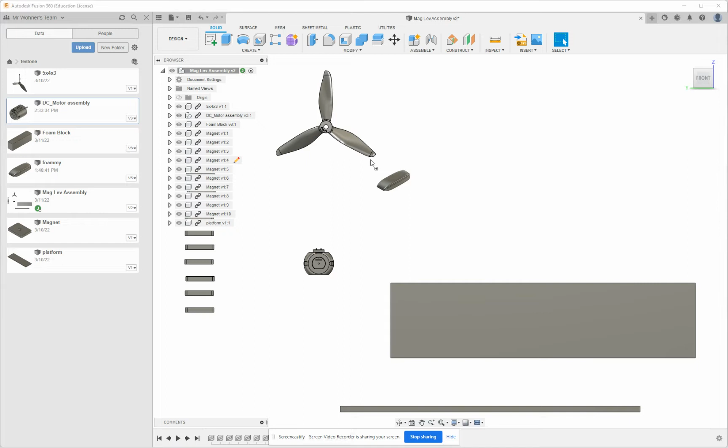So I opened up the maglev assembly here, and now we're gonna add our foam block. It's right here, click and drag and drop it in, then move it over to here and press OK. This block itself, I'm gonna hide that, so I'll turn off its visibility.

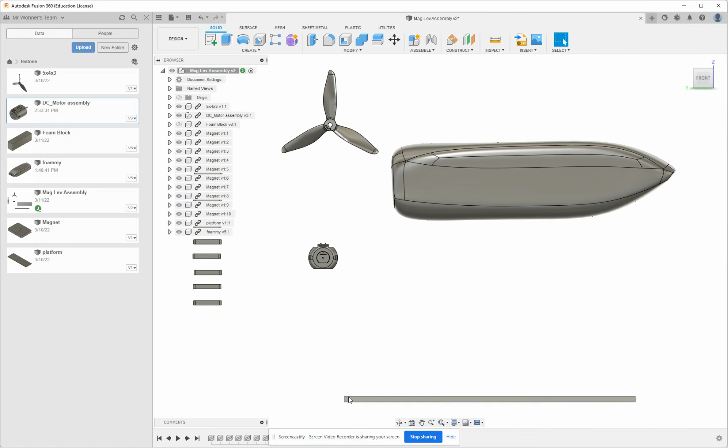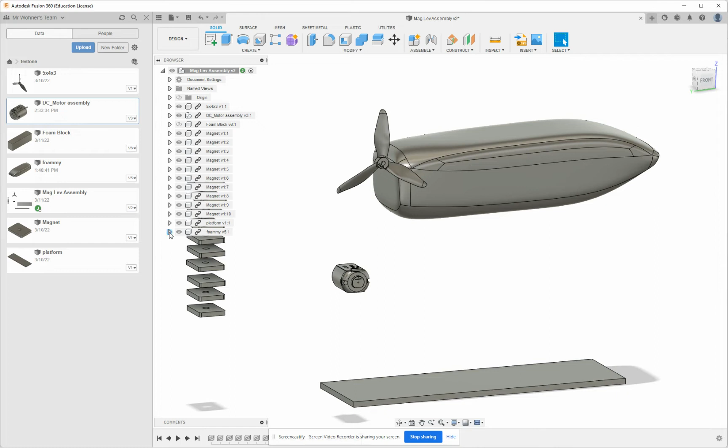Now, when you assemble joints, you need a point to assemble them from. I'm going to bring this one to the top of this base plate. When we built this, I knew where the origin point was, so it doesn't necessarily have a point on the end here, but I do have the origin. I just need to make that visible, so I go to the item, expand it, and turn on origin visibility, and there's that origin point. If I expand this, this is the origin point.

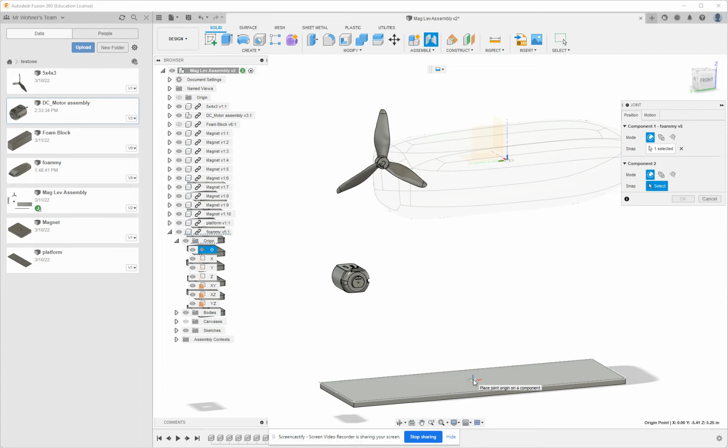Okay, so I'm going to assemble a joint. I click Assemble Joint, and the first one has been selected, which is the origin point, meaning the origin is going to move to this one here. That's the second one I want. I want to put it right on top of the center of this.

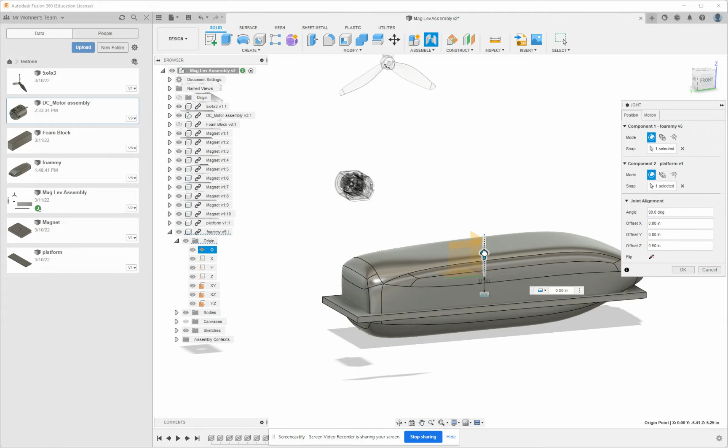I placed the two there, but you'll see that was the middle of that particular item. I know this was 2.5 inches tall, so the center of this was 1 1/4. I need to move it in this direction, 1.25. Okay, so there we go.

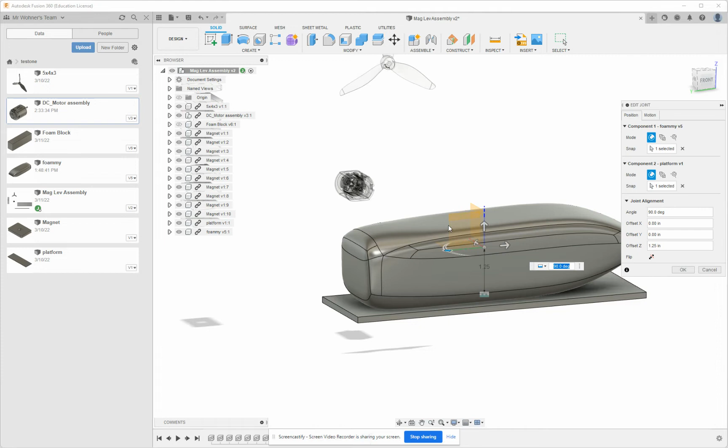Now this one has been placed, and if I needed to still move it, I can continue to move it because I've created the joint right here. I can go to the joint, right click, and edit joint. If I need to adjust it, like move it back a little bit, I think that's probably the best place, and that looks most accurate. So that's how you create a joint. I can turn off my origin visibility on this one.

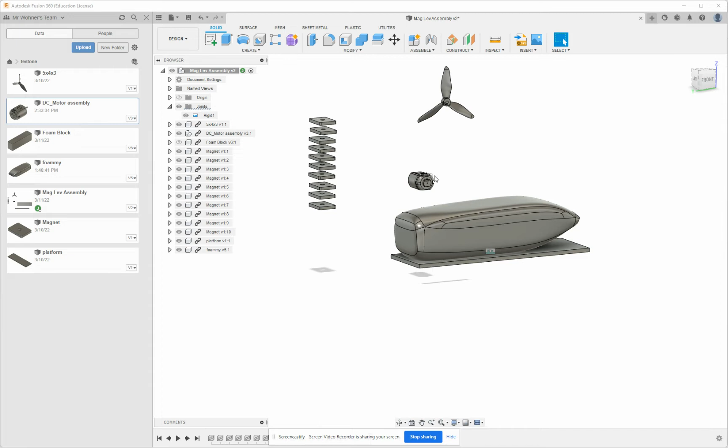Now there's some other special joints you want to try. The other one is when you're going to put the propeller on top of the motor. During the joints, you want to make sure you grab the point that you're attaching it from. So I'm going to construct a new joint.

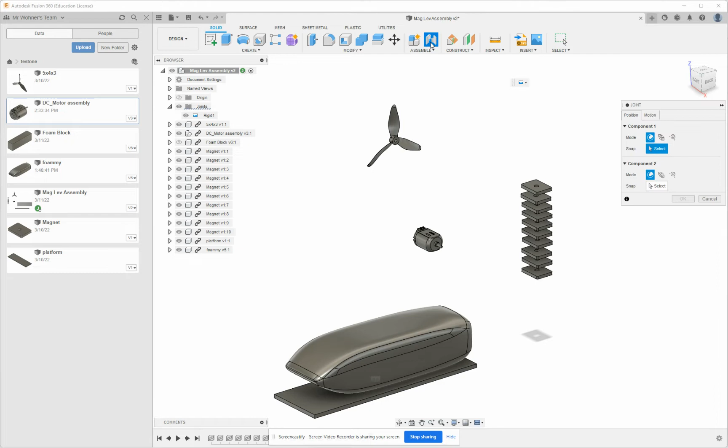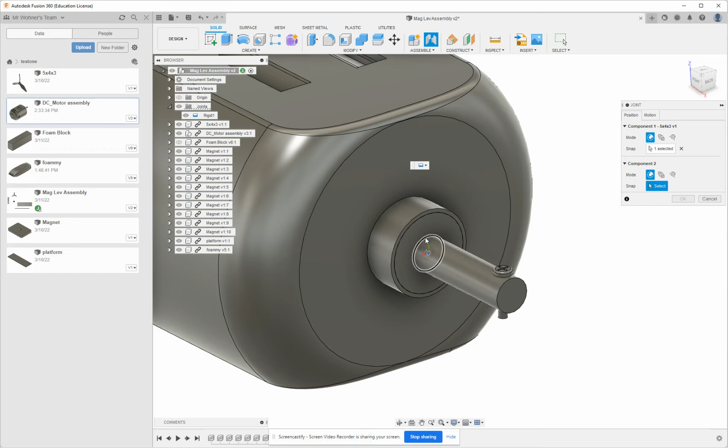Here's the shortcut, assemble a joint. I'm going to zoom in and get the center of this shaft, the back end of this shaft here. If I click on the circle, that means I'm getting the center point of it. So that's the first one selected. The second one is where I'm going to attach it to, and I want to attach it to the center of this.

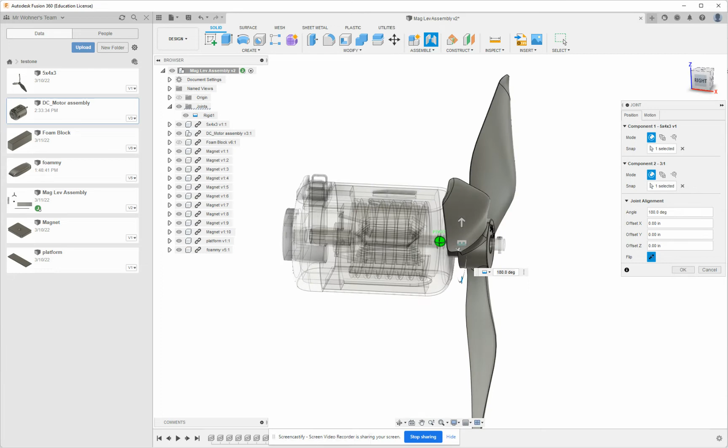So there we go, it is now attached to the center. Let's take a look and see if that's good. It is, but it's actually flipped, so I need to flip it, and that's the way I want it. It's now in the right position, so I can press OK. All right, so now those two items are put together.

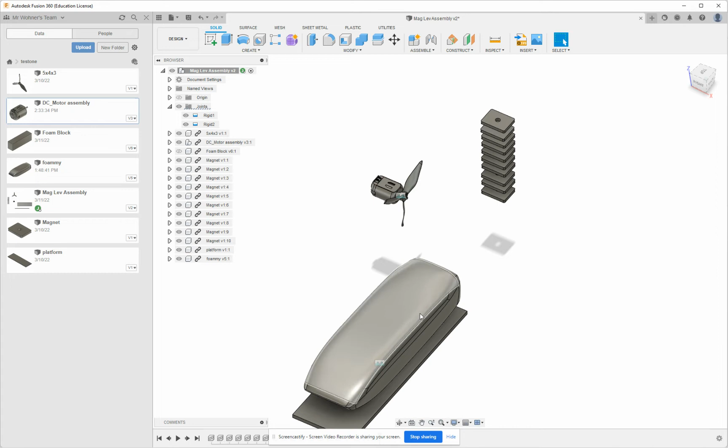Now, the last thing I'm going to do is show you how to get this motor over to a point on the car here, the foam block. So you need to find a place on the motor. The interesting thing about the motor assembly is that if I expand it, it's made up of a bunch of different bodies, so we need to first create a rigid group for this.

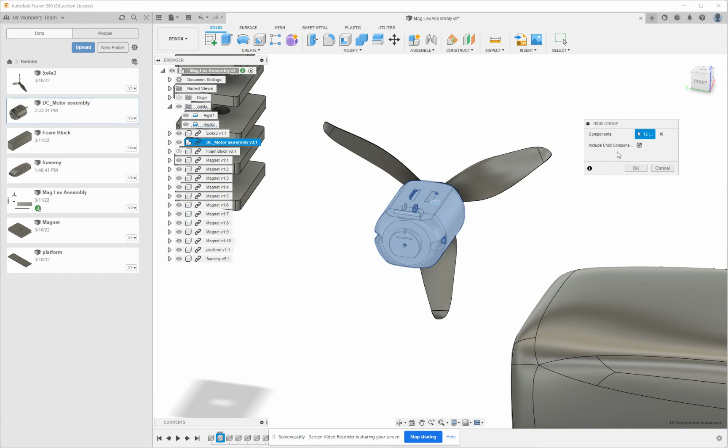So I'm going to click on the DC motor, right click it, and make a rigid group. All 12 of those components are locked together and will move consistently together. I press OK, so now I've done that. Now I can go ahead and move this motor along with the fan that's attached to it.

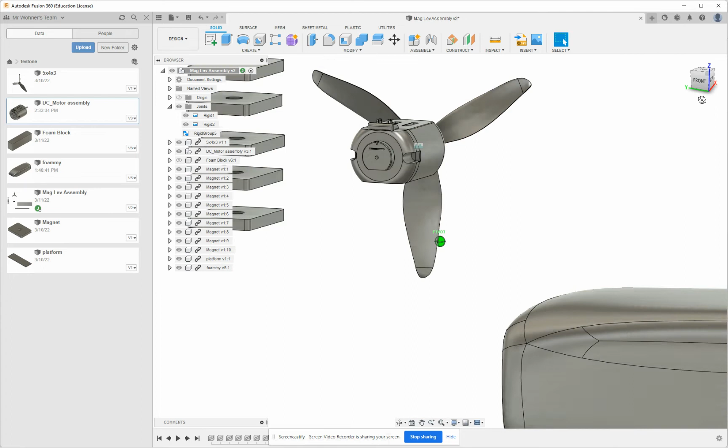We need to find a point where we want to put it onto this car, but there's no exact point here that I'm going to find. So let's make one. We need to go into our sketch and create a point, and I'll show you how to do that in a second.

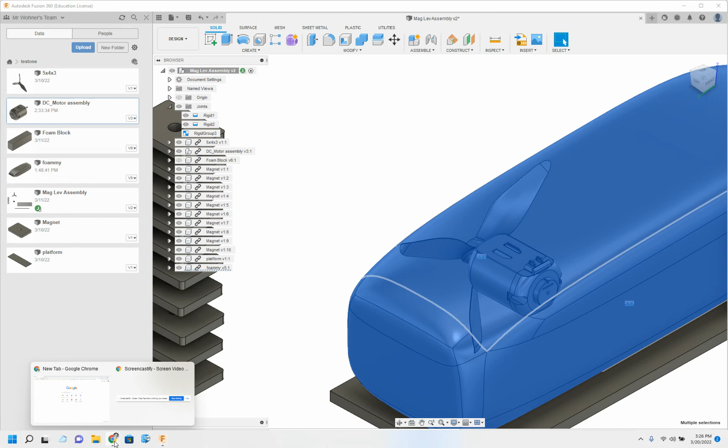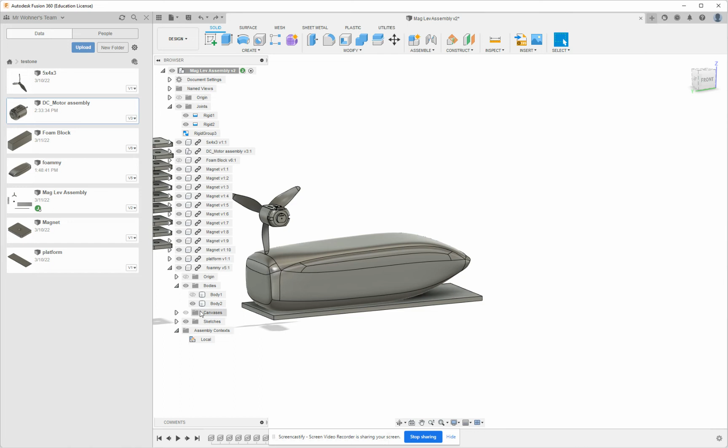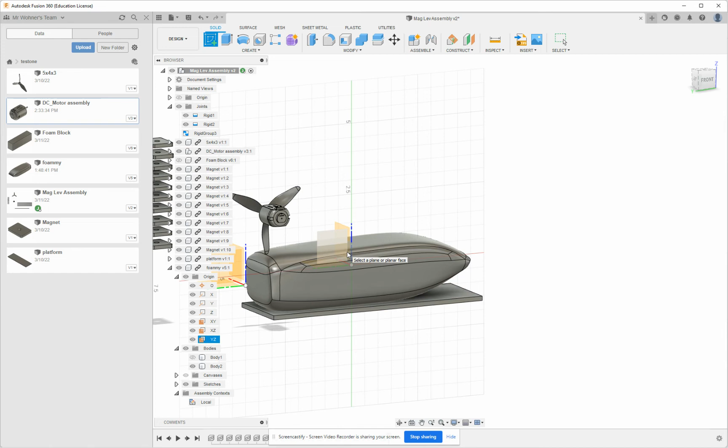Okay, so we just need to make a point on this to attach it. We're going to take this body, called the foammy. We're going to turn on the origin and get that origin point again, and create a sketch using that plane. We want to create our sketch on this plane here.

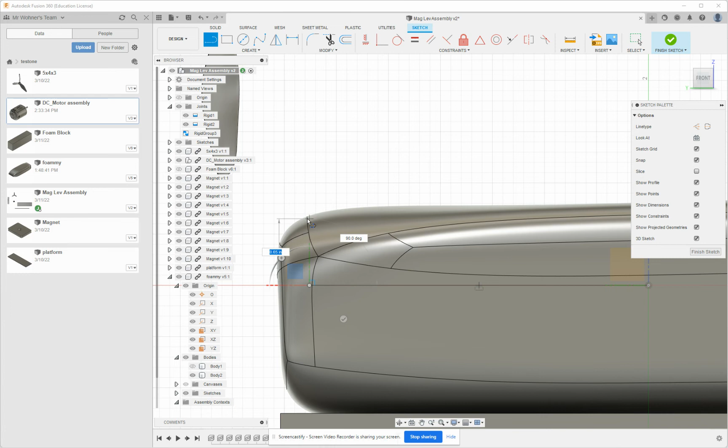We'll change our view and draw a line starting at the origin and bringing it right out to about there. Then put another line and put a point right there, and finish that sketch. So now we do have a point that we can bring this to.

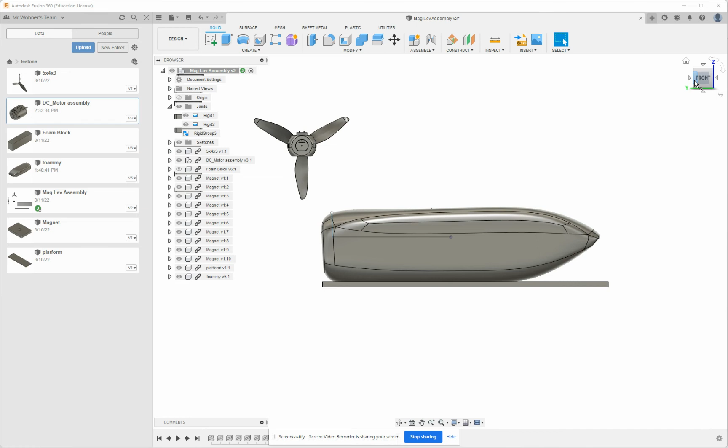I can turn off these origins. So there's a point there that we can attach this to.

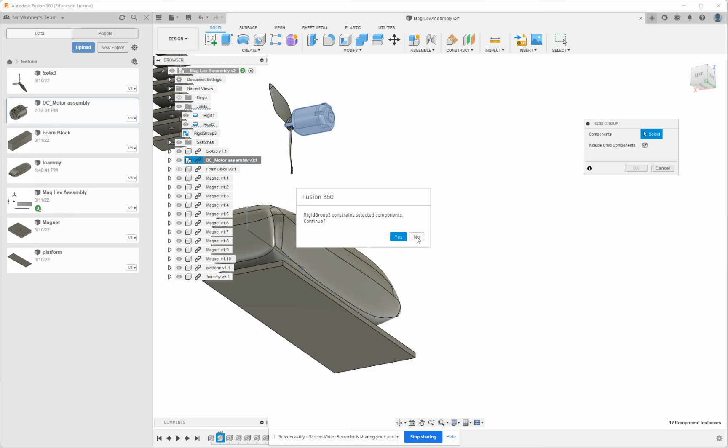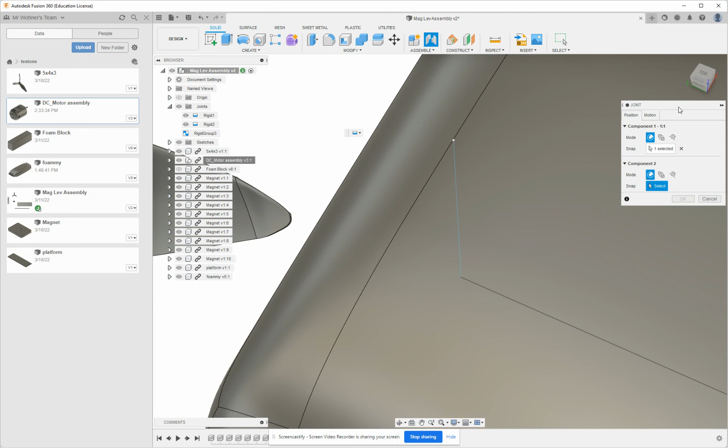All right, first we're going to make sure our motor is a rigid group, which I think we've done already. So let's go ahead and make an assembly. We're going to take this point here, with the blue axis up, and put it on top of that point there, with the blue axis. And there it is. Good.

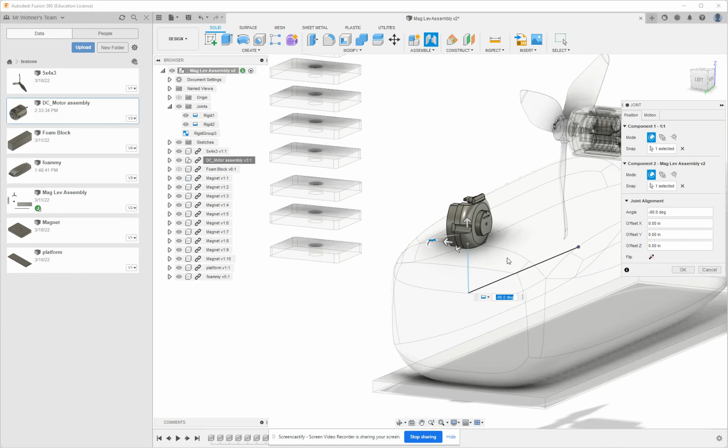So now we have those two points together, we're just not in the proper rotation. So we're going to rotate this to -90 degrees and press OK. All right, so there we go, this is now in position.

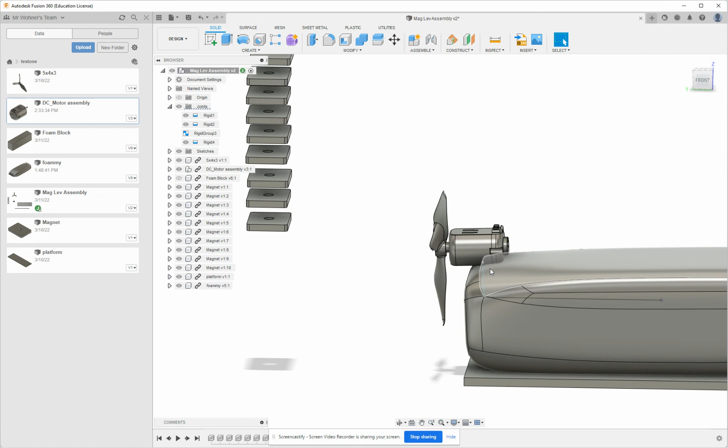I think I want to move it in that way a little bit. So I just go to the joint itself, right click, go to edit joint, and we're going to slide this back, maybe 0.2 inches. And that looks a little bit better. So that's how you can make a point for this particular item.

And then all you have to do is put these magnets in place, and you should be done.